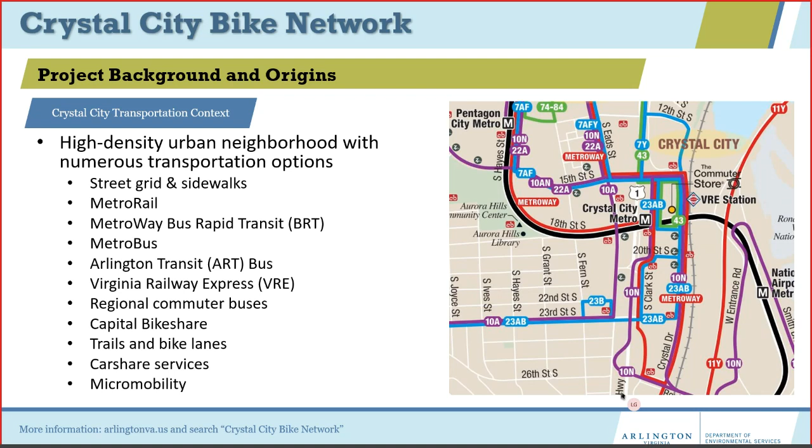Okay, thank you. So one slide back.

Anyway, so we'll provide some project background on this. So essentially, there's some language here from a county board resolution. This was from about a year ago in March 2020. This is from the county board and the county manager's office. They directed the Department of Environmental Services, or DES, to investigate options for enhancing the bike network in Crystal City within the next 4 years.

And you can see some of the exact language here, and it focuses on the first outcome, a network of enhanced bike facilities such as protected and buffered bike lanes, as well as the where. So the network will be focused east of Richmond Highway from the Alexandria border extending north to Long Bridge Park. And this also includes considering trade-offs within the right-of-way. And you can see in that last bullet point, it mentioned a 4-year timeline with implementation occurring by the end of 2024.

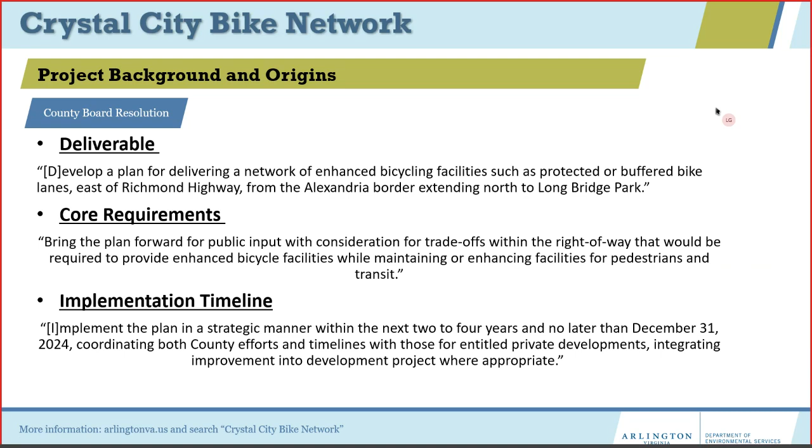And so this directive was a result of a few factors which are reflected in the requirements. So the first major requirement is transit. There are plans to enhance the north-south Crystal City Potomac Yard Transitway, and there will likely be a lane dedicated to transit. And so just to give some background on that, the transitway currently provides direct service along the Route 1 corridor between Braddock Road Metro Station in Alexandria all the way to Pentagon City.

So it's currently the only local bus service which provides this connection to neighborhoods east and west along the corridor. So how can we make a bike network that functions in a way that's complementary to this existing transitway as well as an enhanced transitway?

The second requirement is balancing the needs for all modes. So at this point, we're trying to make sure bikes, pedestrians, transit, the businesses who require pickup and drop-off, loading and parking, how can they all have their needs met? The third requirement includes aligning with guiding planning documents, and I'll get to those in a minute. And the final requirement is to coordinate the bike network with redevelopment, including Amazon's HQ2 and other redevelopment projects.

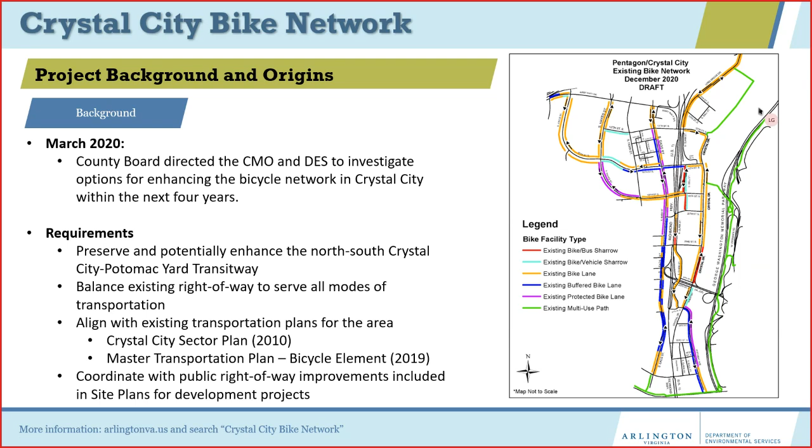So when looking at these concepts for a bike network, the county integrated all of these requirements together to create a network that integrates transit and all the factors that I mentioned, as well as the stakeholders in Crystal City. And so here are some of the plans that I mentioned. There's really two for Crystal City.

So the first is the Crystal City Sector Plan from 2010, and this really focused on comprehensive bicycle and pedestrian networks, as well as being really focused on trails. So the plan specifically mentions trail connections from Crystal Drive to Long Bridge Park, as well as from Four Mile Run Trail to Crystal City and Potomac Yard.

The second document is the bike element, and that's the map with the blue and the red. And that's from the Master Transportation Plan 2019. And this really focuses on improving the bike network in Crystal City, and it's a little more specific than the sector plan and takes development into account.

So you can see this planning map from the bike element that I mentioned. It focuses on upgrading existing bike lanes on Potomac Ave and Crystal Drive, as well as providing a lower stress route linking Crystal City to existing trails, green space, and to Pentagon City. And when I say low stress route, that just means a bike route that the average bicyclist would feel comfortable using. And so next I'll talk about the benefits.

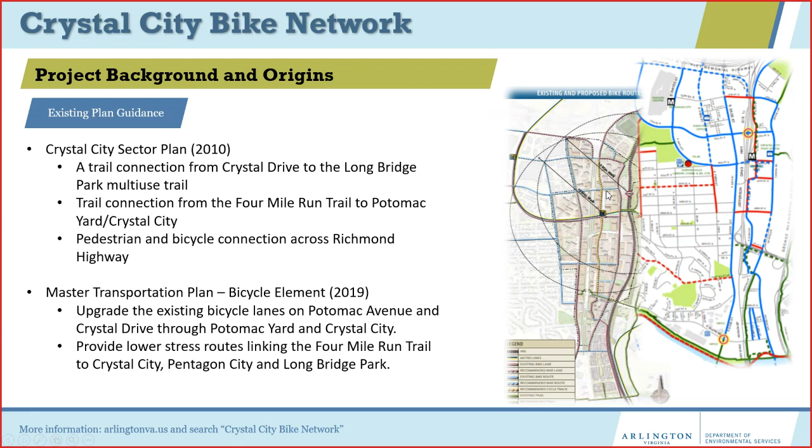So here are some benefits and opportunities to creating a connected bike network in Crystal City. So there's increased safety, access to trail connections like the Mount Vernon and Potomac Yard Trail, and reduced bike lane blocking. So sometimes delivery trucks or other vehicles can inadvertently block bike lanes, and it makes it really difficult for cyclists. So the bike network is a great opportunity to address an issue that cyclists experience in Crystal City. And you can see there's a few other improvements and opportunities as well. So I'll go ahead and pass it over to Dan to discuss some of the challenges.

Hey, thanks, Leah. Leah went over the scope, really illustrating that we're trying to get something done within the next 4 years because we see that there's a need out on the streets in Crystal City. Leah also talked about some of the existing and planned transit facilities, the transitway, and the fact that it will provide that critical link between the Braddock Road Metro and Pentagon City Metro and a lot of the development that's occurring in the area. This is how a lot of people get around between these areas.

Some of the other challenges are there's a lot of underground utilities in Crystal City, which really constrains how much we can do with moving curbs and whatnot. Development schedules: there's clearly a lot of development occurring in Crystal City as well. And that is something that is on its own timeline. It's something that we don't necessarily have control of. But we'll show you through the rest of the presentations how we're trying to capitalize on some of the development that may be occurring. Again, limited right-of-way is very similar to the underground utilities and some of the constraints.

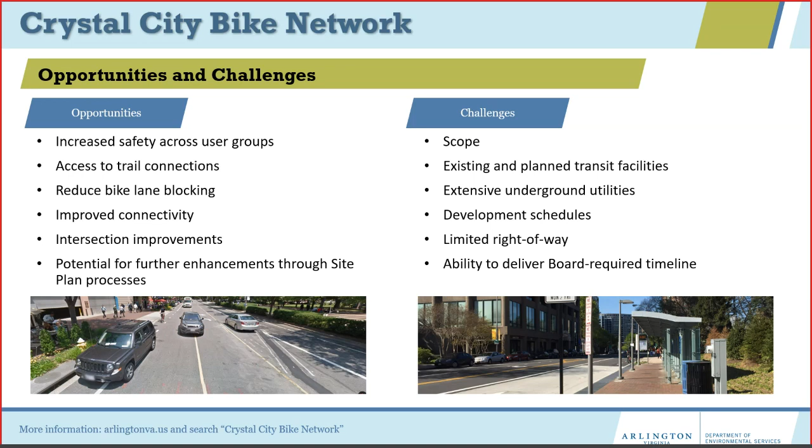So here we're going to start discussing some of the options we examined for a potential bike lane network.

Yep. Got it. Got that microphone sorted, Dan? Yep. Thank you. Yes, sir.

So here's the 4 options, like Nate just described. The first is northbound and southbound bike lanes on Crystal Drive, which is pretty much what's out there right now. The second option that we'll discuss is a 2-way cycle track on the east side of Crystal Drive. So that's on the side where you have the water park, and it's on the northbound lane side of the street. Option 3 is the west side of Crystal Drive, where you have more of the restaurants and other eating establishments.

And then Option 4 is a southbound protected bike lane on Crystal Drive. Again, that's the side that is close to those restaurants. And then a northbound contraflow protected bike lane on Clark Bell. A contraflow lane just really means it's a lane that goes against the vehicle traffic stream. So the vehicle traffic goes southbound on Clark Bell, but the protected bike lane would go northbound. And we'll talk about that in more detail in a moment.

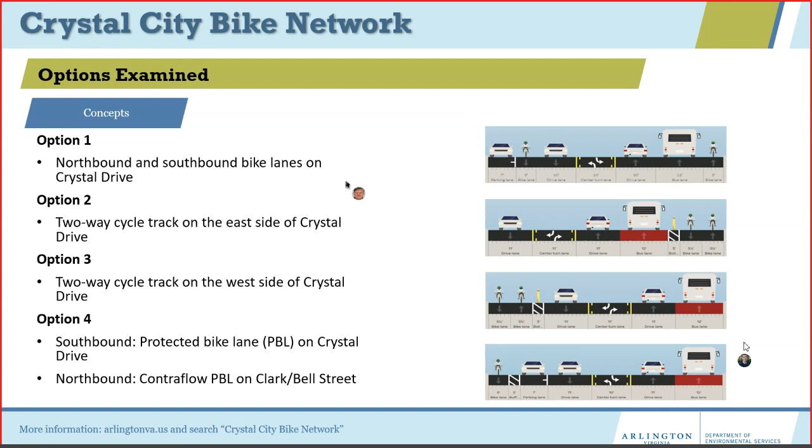Okay, let's see if I can advance.

All right, so a little bit more about option 1. You can see on the graphic here to the right, this is basically what we're talking about with option 1. If we go from right to left, you'll see that there's a bike lane, then you have your bus lane, you have a vehicle travel lane, you have your two-way left turn lane, then another vehicle lane, bicycle lane, and a parking lane. And this is pretty much what's out there right now.

So that is obviously something that would be feasible within that 4-year time frame. You do maintain a lot of the curb extensions that are out on the roadway, and those are seen as a benefit to pedestrians. The disadvantage, of course, is it really doesn't address the issues with regard to bicycling on Crystal Drive. So as a result, it's not recommended because it doesn't really address those issues.

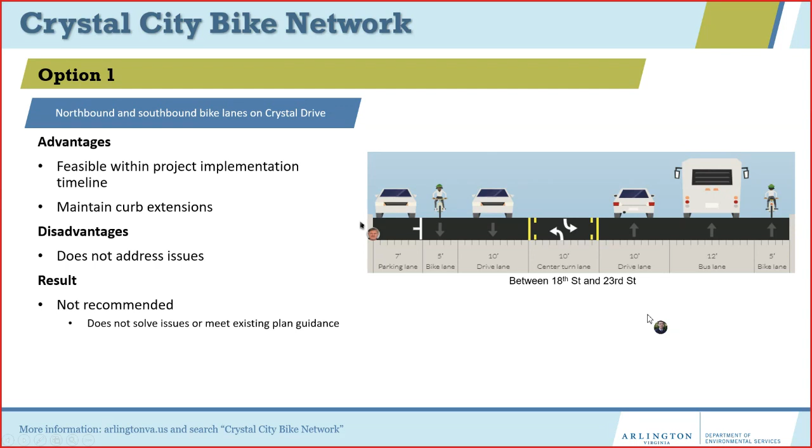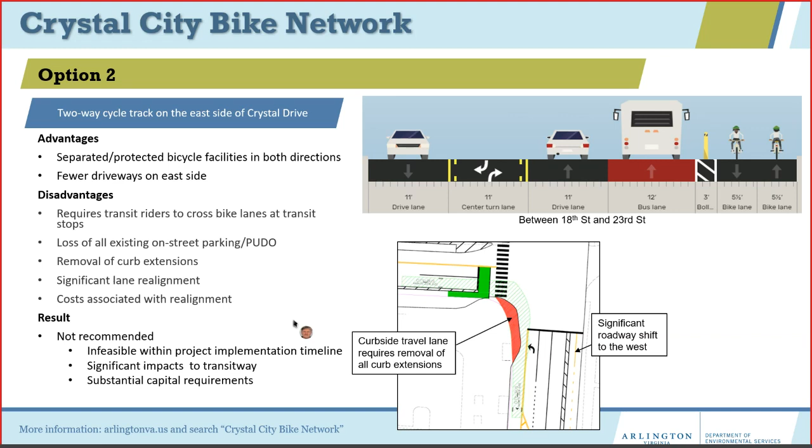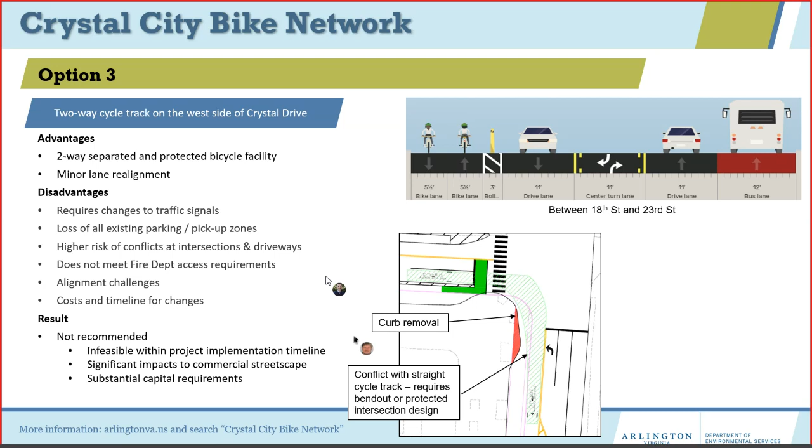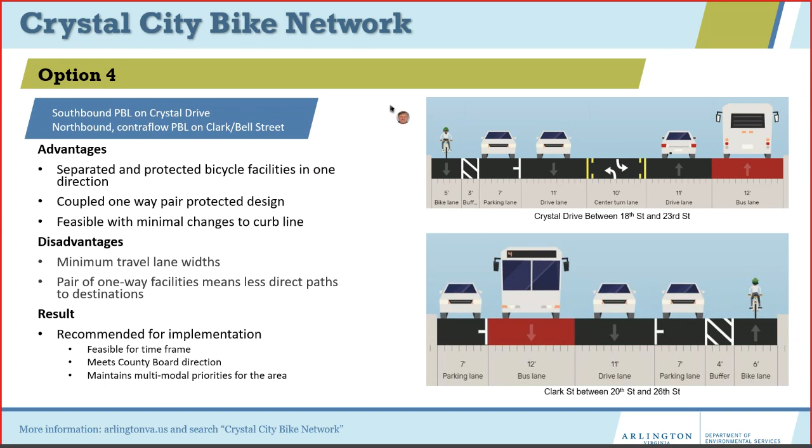That seems to be stuck for me.

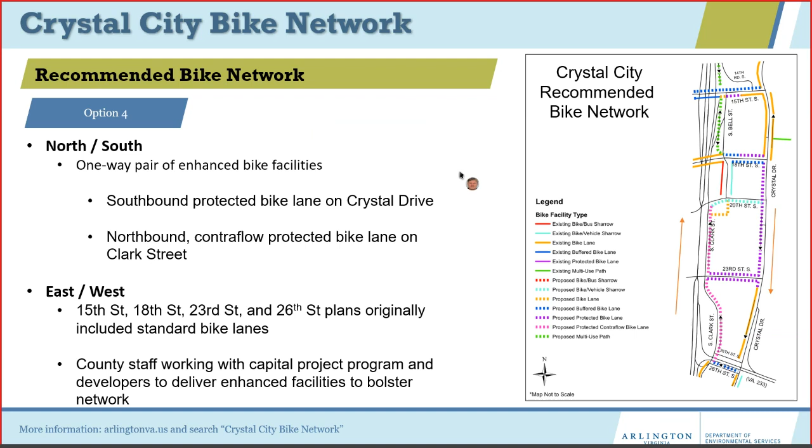Okay. Yeah, I don't seem to have control here. That's Nate, thank you.

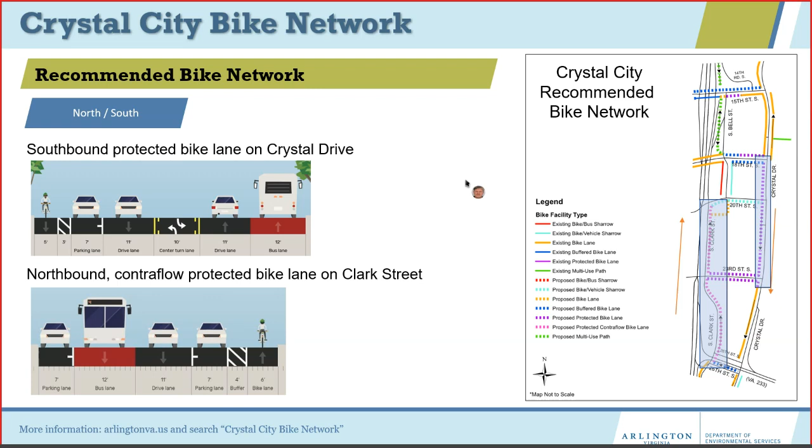And we'll talk a little bit more about some of these cross-street connections, because that's what really provides the key to making this successful, so that you can make it in these one-way protected pairs. And for that, I'll turn it over to Kevin to describe that. Kevin? Thanks, Dan.

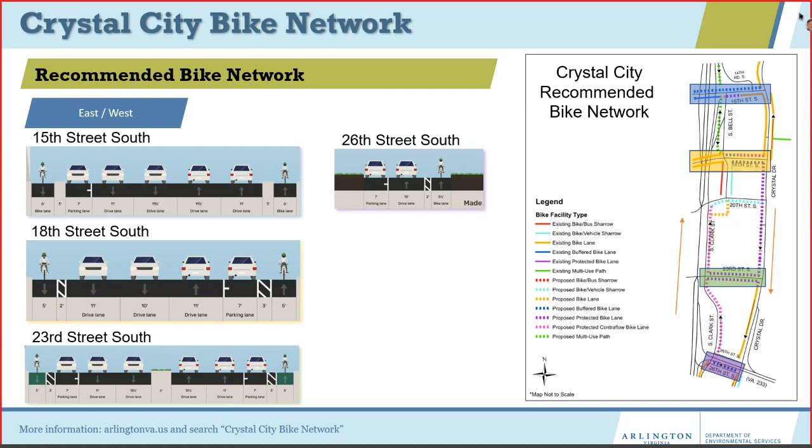And the last part to that would be 26th Street. We looked at this as kind of the first piece coming off of Crystal Drive if you're heading in the northbound direction. In order to allow more easy access to that northbound contraflow, we looked at removing the parking along the north side in order to create a buffered bike lane to allow for that westbound connection.

All right, so I'm going to take over here from Kevin and talk through our next steps for the Crystal City Bike Network public engagement. As you know, the virtual community meeting is occurring now. And tonight we're actually going to walk you through an online engagement form using the Konveio tool, which will launch shortly, and Aaron Potter will walk you through how to use that. That form will be open until March 14th at 11:59 p.m.

It's a pretty unique tool. I think it has some really cool features that allow us to really delve into the details on what each segment of the bikeway network that we are recommending can look like, and then bring that in for the ability to comment directly on some of the locations. So that will go through March 14th.

There will be a second community meeting later this spring to share what we heard from that community forum, as well as an updated design for the bikeway network based on the feedback we received. And that will conclude with the selection of a preferred alternative for implementation, which will go before the county board for action later in 2021.

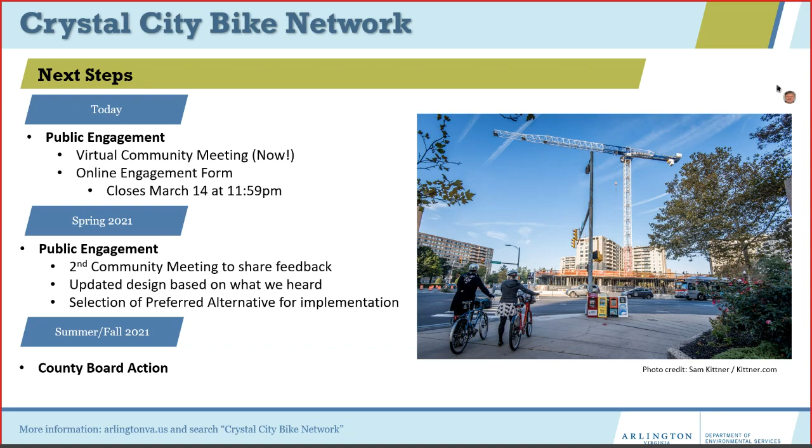Hey, Aaron, I don't know that we got your screen on the live event quite yet. Oh, how rude. Send that to me real quick. No, I think it's coming up. All right. There we go. Delightful. All right. Sorry, y'all. Here is a screen you should have been looking at while I was talking.

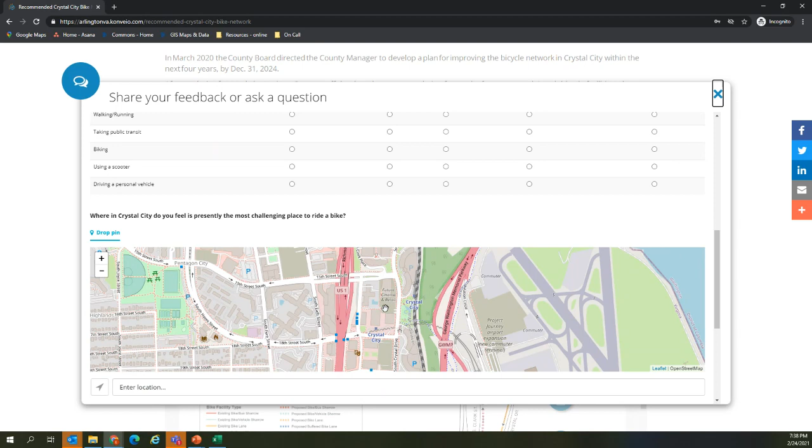So these are the steps, like I said, for folks who maybe are just needing more information or a refresher on what we talked about here today. This is the county board resolution, alternatives, and then this is where we're going to ask some questions to help us understand what kind of rider you are. And then opportunities to share where your current challenge is. So this is a map feature and what could improve your biking experience at this location for your most challenging. And then if you've got any feedback or recommendations for the network, we're going to ask that you share them in there.